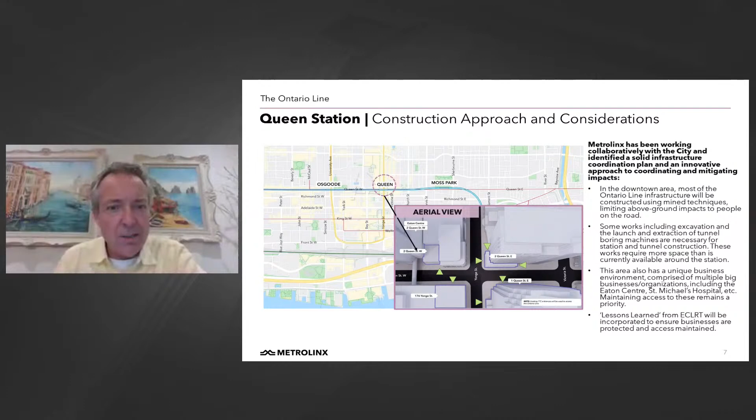First off, we're going to talk about Queen Station. Queen Station is a very interesting station. It's one of the most difficult stations in the entire alignment that we're going to be building. It's right downtown. If you know the corner of Yonge and Queen Streets, you know that on each of the four corners there are very tall buildings, making it very difficult for us to do the conventional mining operation that we're using elsewhere. What we're doing is making sure we have entrances on all four corners, and making sure that as part of our work, we maintain the vitality associated with this very important intersection.

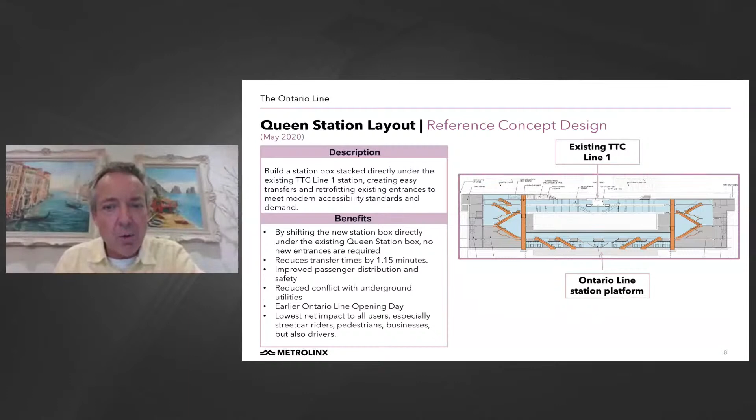Queen Station, as you can see here, is very deep. We're directly underneath the existing Line 1 station, which makes for an excellent transfer, the shortest transfer. When it was the Relief Line South, the station was a little bit west of this location, which made for a much longer transfer. By shifting under the existing Queen Station, it also allows us to do a method of construction that lets the Line 1 Queen Station remain in operation during the entire construction period.

In order to build the station, we're doing a form of construction called open cut construction. That means we're going to be digging a hole in this very narrow street and building the new subway, going under the existing subway. Queen Street is going to be closed from Victoria Street through to Bay Street.

We're going to maintain Bay Street being open, Yonge Street being open, as well as Victoria Street. James Street, just west of Yonge Street, will be closed going north. But we're going to make Albert Street into a two-way street so that there's access to the courthouse as well as the Eaton Centre. We're making sure all of the entrances remain open.

The pedestrian sidewalks are going to remain open. It's the auto traffic and cyclists for whom we'll be providing a safe detour, and we're working quite closely with the TTC for streetcar diversion. I'll talk about that on the next few slides.

Line 1, the station at Queen, will remain open during the entire construction period, as will access to the PATH network. Deliveries for businesses in the area are all protected as a result of the closure plan we're currently putting in place, and this closure plan is going to City Council for approval.

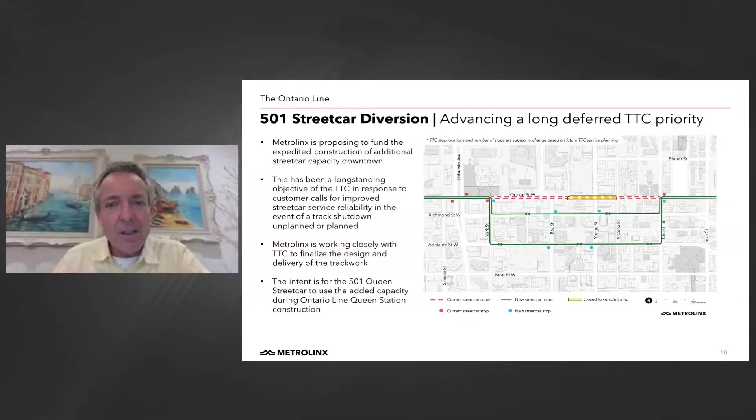So what to expect next? Well, this summer we've been holding stakeholder consultation for the long-term closure. Throughout the fall, we're going to be briefing the BIAs and the community. And then throughout the winter of 2022, we're going to start some early works for the utilities, and then construction starting in 2023. What I'd like to do is just ask Franca to fill us in on some of the community outreach that we're going to be doing as a result of this closure.

Franca? Thanks very much, Malcolm. Good evening, everyone. Yes, certainly building a subway in the heart of the city is a big challenge.

And we know that many of you probably over the summer heard a little bit about the Queen Street closure. And we've been starting since that time to reach out to some of the local stakeholders, including some of the residents associations and, of course, the business community. The business community in this area is very vibrant. There are about 3 BIAs who are directly or very nearly directly affected. And so we've been working and discussing with them their concerns.

We understand every time we do infrastructure projects in Toronto, we learn more and more about how to improve business support programs, how to minimize the impact on the local community. And we intend to apply a lot of those lessons that we continue to learn.

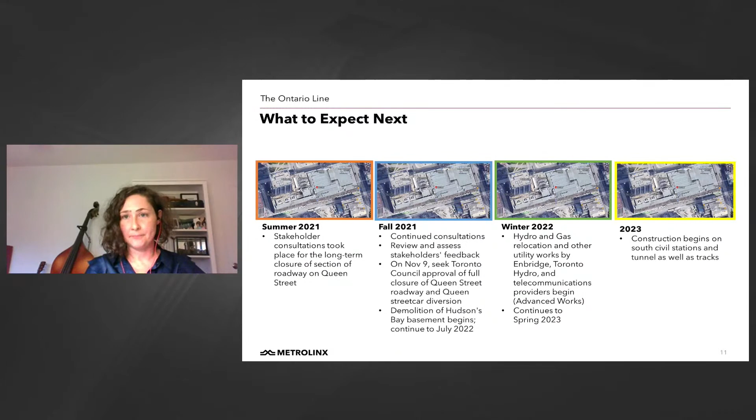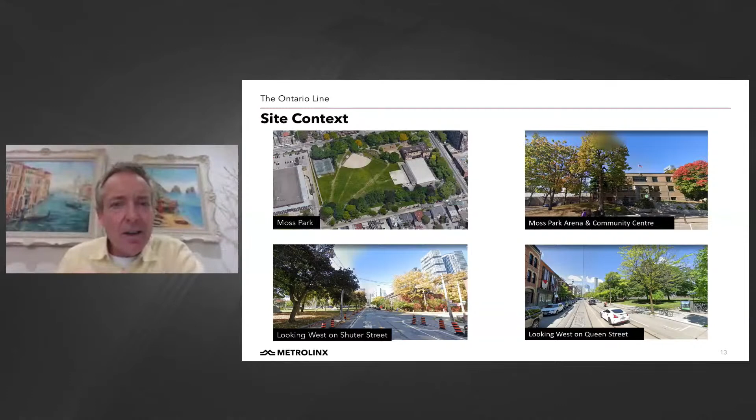So now we're going to talk about Moss Park Station and the revitalization of the park that's going to be undertaken. Next slide. So in context, those of you that know Moss Park know that it's a large green space in a very vibrant urban development. Moss Park Arena and Community Center is there, and it's on the main streets of Queen Street and Sherbourne Street.

Next slide. So as we were developing the concepts for the station, and the station design and location is very similar to that being undertaken for the Relief Line South, we considered the local businesses and what the impact of this construction would be on those local businesses.

We looked at the community, and there's communities that are very important that the station serves. We looked at the traffic and modeled the traffic impacts, making sure that the surface transit network was maintained throughout the construction period. We looked at the connectivity of both the surface network to the underground network, as well as people being able to get into the station from the local communities.

We, of course, take into account the tree canopy and the environmental impacts of some of the decisions that we've made. And then there's the constructability of the station that is part of the equation when you're building in a dense urban environment like downtown Toronto. Next slide.

So the station location, as we have it, and as the Relief Line South had it, has the shortest construction period. It's 6 months shorter than a mined type of construction, and it has a better opportunity for us to be able to integrate with the city's park.

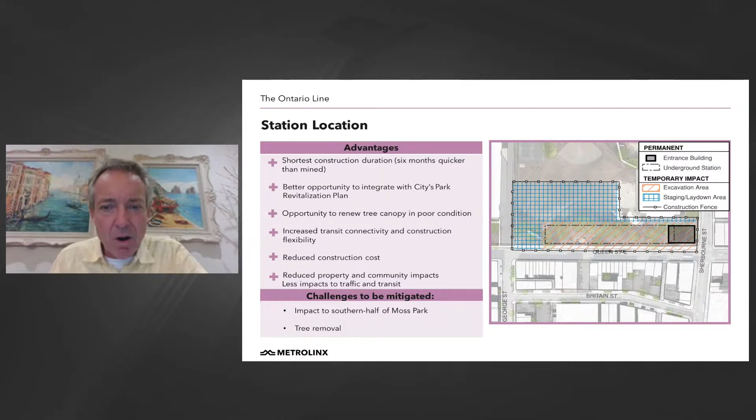There's a number of projects happening on this site: a new community recreation center the city's contemplating, as well as the Metrolinx subway construction and the laydown area necessary to support that. We've been working closely with Parks and Forestry on that, as well as the community center, to make sure this is all staged well to support both projects going forward.

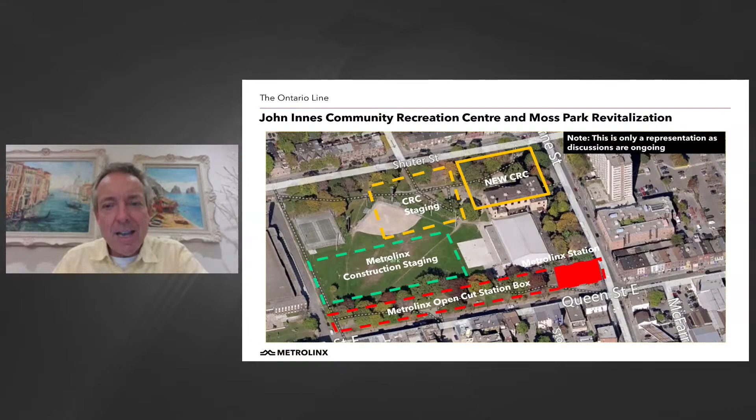Next slide. What I'd like to do is pass it over to Aaron, and Aaron, maybe you can talk about the work that's been undertaken with the arena board and the design we have going forward. Yeah, thanks, Malcolm.

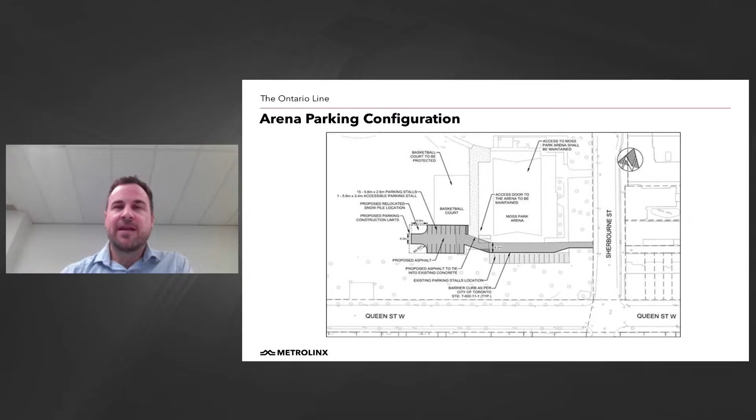Good evening, everyone. So as you can see on the screen here, the station head house is being constructed in the southeast corner of Moss Park. As part of that project, we're also enhancing and upgrading the existing parking infrastructure at Moss Park. There's been discussion with the arena board about altering the existing car parking into a more useful and user-friendly experience for the Moss Park arena users.

Next slide there, Marshall. As Malcolm alluded to at Moss Park, there's various pieces of infrastructure and integration required with various stakeholders and third-party coordination. So effectively at Moss Park Station, there's the Moss Park Revitalisation Project. There's our design and construction timeframes between our project, the Ontario Line, and the Moss Park Revitalisation Project. What we see is meshing together to create an outcome that's as clean as possible for the schedules of both projects. Then we go through the reinstatement of the park with the soil cover, etc.

So the Ontario Line will create space for the revitalisation of the park and the future project for that park. In June 2020, we started extensive discussions with the city around the park. Through those discussions, we've looked at the concepts and moved various aspects of the station in consultation with the city, including some setback allowances to create the best visual amenity of this corner of Moss Park. Next slide there, Marshall.

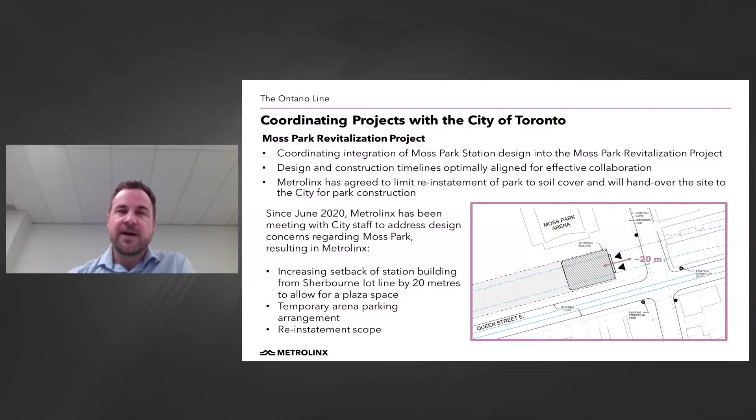As Malcolm also alluded to, a key part of this is around the trees, and there's various conversations ongoing about the surveys and the arborist reports, etc. So we're working with the city on compensation strategies. There's work with the Toronto Region Conservation Authority, the TRCA, to repurpose some wood for wetland restoration projects, and also working with Toronto Parks, Forestry and Recreation Division and the community to explore park enhancements, tree planting, etc. in the neighbourhood. Next slide there, thanks.

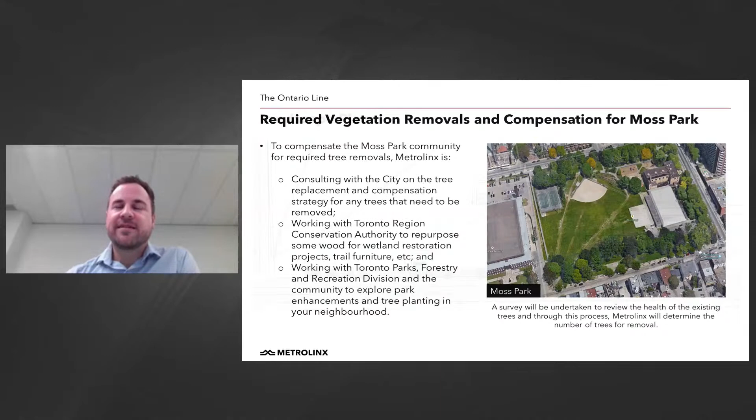This is just an overview of the concept for Moss Park. You can see the orientation of the head house and the connectivity to the local infrastructure and the streetcar network, but also how it's set back to create that visual amenity and a consistent language in that corner of the park. And then I'll pass it back to you, Malcolm, for the next piece.

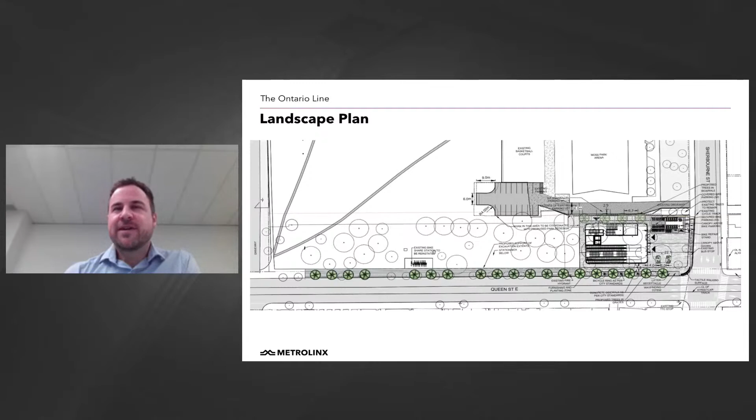Thanks, super. Thank you, Aaron. Much appreciated. Next slide.

Next slide. Some of the key accomplishments we've had to date: we've had extensive outreach with landscape architects and consultants to develop a plan, and broad public engagement regarding Moss Park and how and why we're doing this. The Moss Park Arena Board has been consulted throughout the entire process to make sure they understand how they can continue operations even during construction.

Our next steps are to complete the tree survey and the archaeological investigations that have to be done in advance of construction, and the full environmental site assessment, due in November 2021. Then ongoing stakeholder engagement and setting up community tables to fully engage members of the community in the developments happening at Moss Park. Next slide.

By way of context, there are two sites: the north site where the station box is going to be, and the south site, where construction, launch, and staging of the tunnel boring machines will occur in support of the entire Ontario line from the Don Valley all the way through to at least Queen Station, if not all the way to Exhibition. Archaeological assessments have started in this area, with active engagement with the City of Toronto, the Ministry of Heritage, Sport, Tourism and Culture, and the Indigenous nations to uncover the First Parliament site in the south area of the station site.

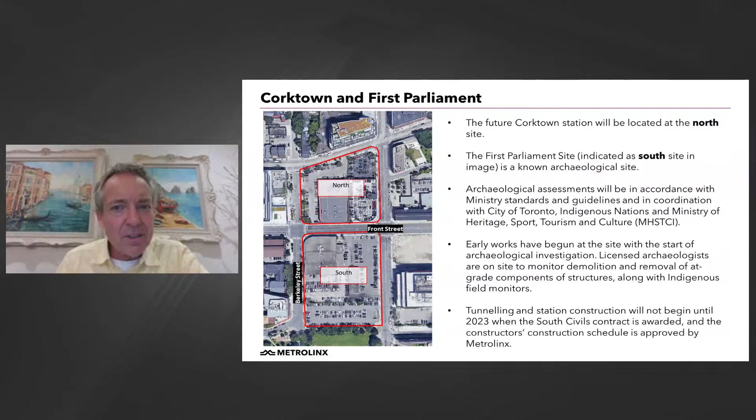There's a long, storied history at the First Parliament site. Indigenous peoples, many communities, lived on this site for centuries, well before colonialism. Then came the subsequent occupation periods, the parliamentary era, where the first two Parliament buildings were built. The first burned down during the War of 1812, and the second burned from an overheated chimney flue. It was subsequently home to a district jail, and eventually became a consumers gas complex where gasification occurred, causing the site's contamination. A positive outcome of this work is that the site will be decontaminated as a result of the building going on here, and the archaeological finds in the area will be discovered and proudly displayed as part of a commemoration plan.

And that's where we are today. We're working with the city, the ministries, the First Nations people, and the communities to take the work originally done by the Ontario Heritage Trust and the City of Toronto in developing an interpretation and commemoration plan, and now we're actually implementing it. We're going to be reaching out to the city and having open tables to discuss the themes and storied history of the site. That's upcoming, and it's exciting - something we're really looking forward to implementing and discovering along with yourselves.